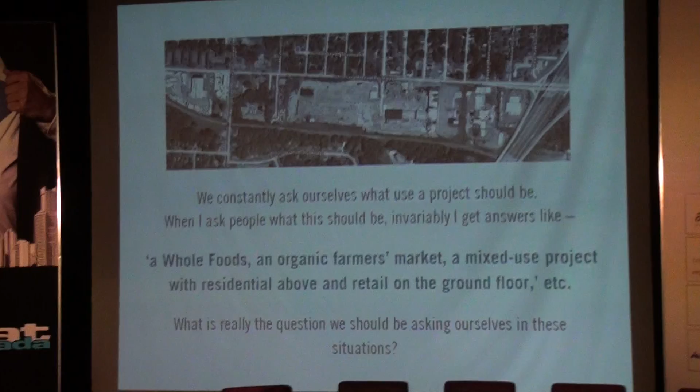But over the years, especially over the last 100 years, we have changed the way we think about cities. And so now, we look at a site like this, and we think, what can that be? When in fact, that site is 11 New York City blocks.

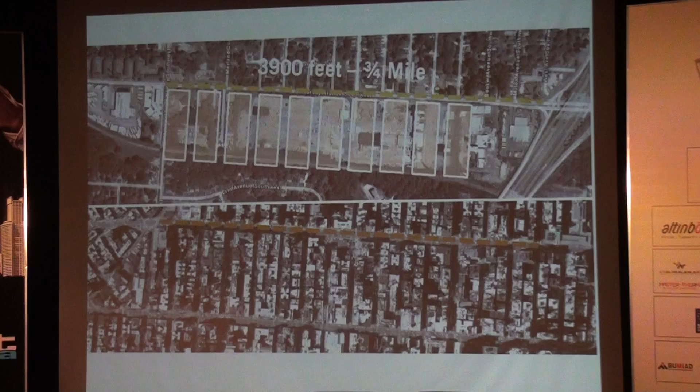It's important to understand that when we build blocks of this size, we create an adaptable, walkable, sustainable community. And so it has to do with the way we perceive of ourselves in the city. Think about the difference between being in Pera and being in some of the new suburban developments in Istanbul or other parts of the world. It's a very different experience.

So this is just a diagram that describes the difference in New York between walking across town with longer blocks and walking uptown with shorter blocks. It's very similar to the idea of walking up and down İstiklal Street, right? Or walking through Pera, where you think you're moving much more quickly than if you're in larger, more disconnected areas. And this will have an importance on the way that we think about cities.

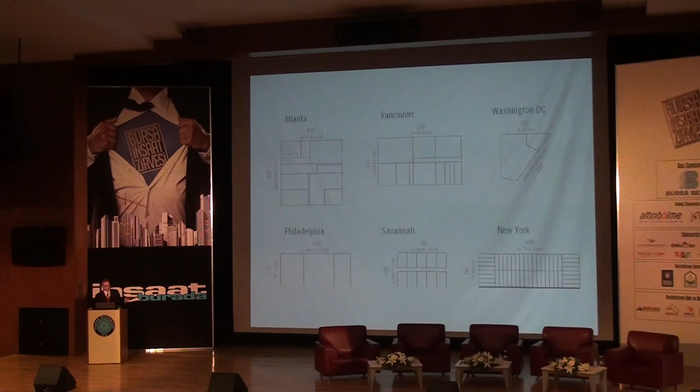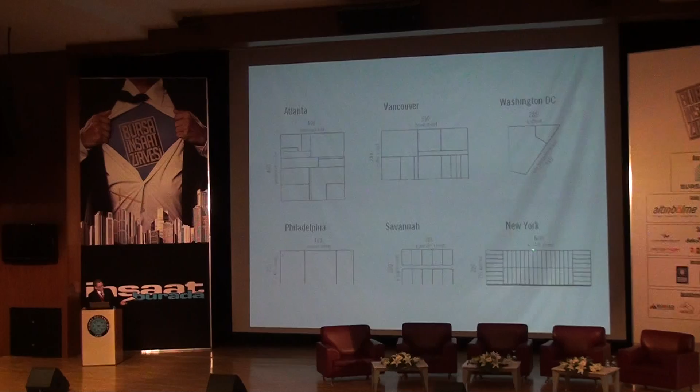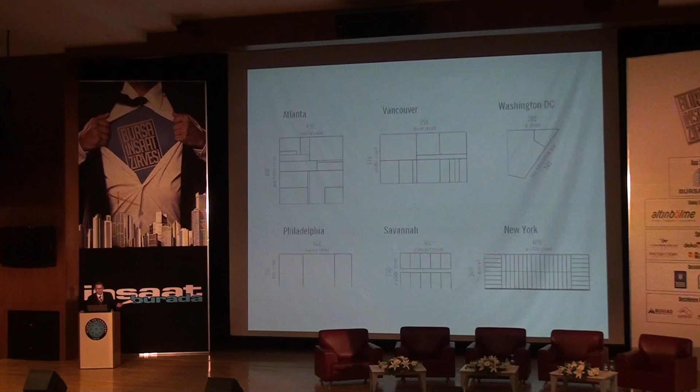So we look at the size of blocks in high-functioning cities like Istanbul. Please remember that the Empire State Building, the largest building in the world for half a century, was on a block that was essentially 60 meters by 100 meters. 60 meters by 100 meters held the largest building in the world in the 20th century.

But this is what's happened. We have very interesting cities with all kinds of great things and all kinds of ways to move through them. We move the bad stuff out because we don't want people to be unhealthy. But then we decided we didn't want to live in the city, so we moved the houses out. Then we decided we didn't want to live with people who made different amounts of money, so we organized neighborhoods based on prices, based on class.

Then we got rid of every kind of transportation other than cars. So if you spent 2 hours crossing the second bridge or the first bridge, you know exactly what I mean. Then we connected everything with highways. And if you think about the primary way that we move through urban areas today, it is all about planned highways, about capacity, and about moving large volume of vehicles.

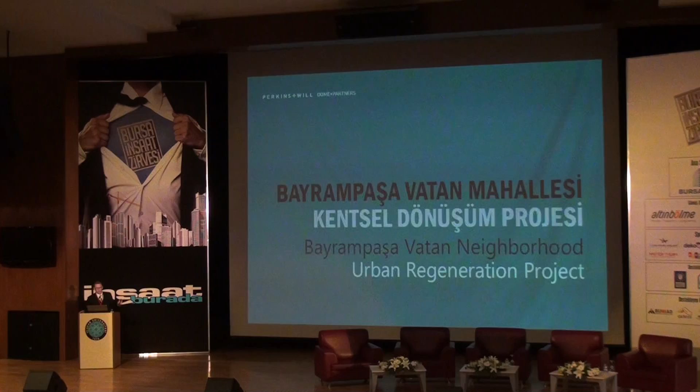This is a neighborhood called Bayrampaşa, and it's one of the urban regeneration areas. Now this is critical because remember, in Istanbul, there's a kind of amazing fabric in the city that is slowly being lost. And we have to think about that as we redevelop.

Our idea is that these areas need to be replicable. They need to preserve the neighborhood character, not exactly, but preserve the character. They need to add value because this is the financial mechanism through which redevelopment occurs. And they need to be resilient, because remember that these are all based on the idea of creating Istanbul and other cities as more resilient urban areas, both from natural disasters but also economically.

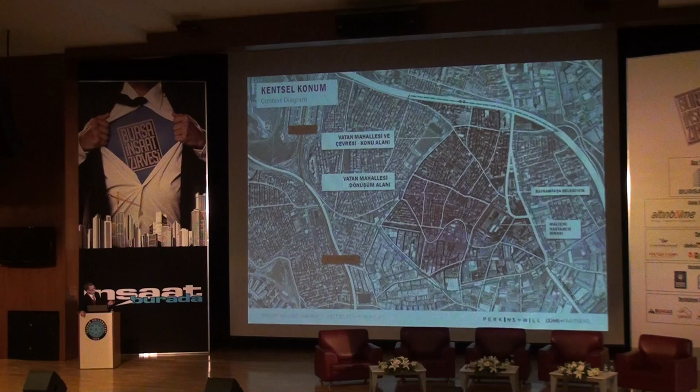So we look at this area, understand the characteristics, create a general relationship of the places, but then we do something very different than what most other groups do. We put in place a street framework. The street framework is the exact same thing that Hippodamus used when he planned Miletus 2,500 years ago, and in fact, was the only way we planned cities for 2,500 years until the middle of the 20th century.

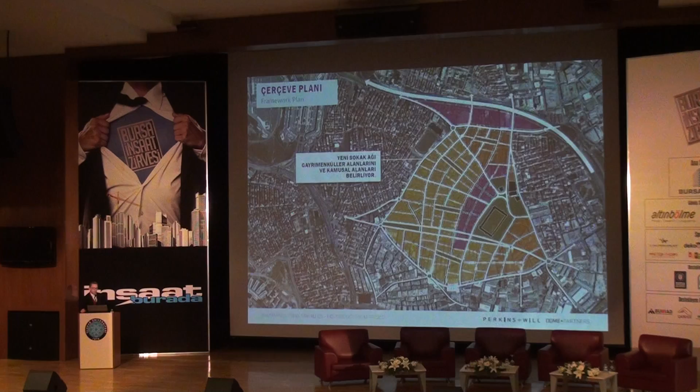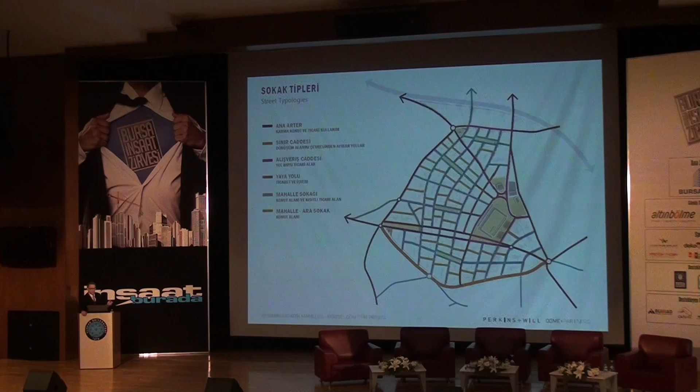And we end up with something like this, which you've all seen many times in many places. We create a series of different kinds of streets because these are important. They're not just about moving cars, they're actually the largest public space we have in every city.

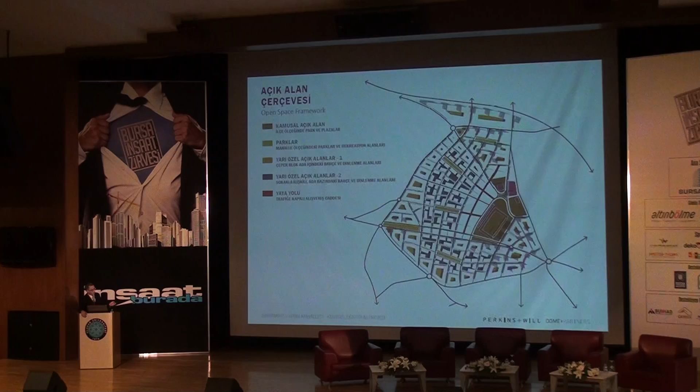And then we start thinking about the different characteristics of open spaces. Now, this is important a bit later, but it has to do again with thinking about parks as both public, but also areas for people that live in individual buildings. And so again, it looks something like this.

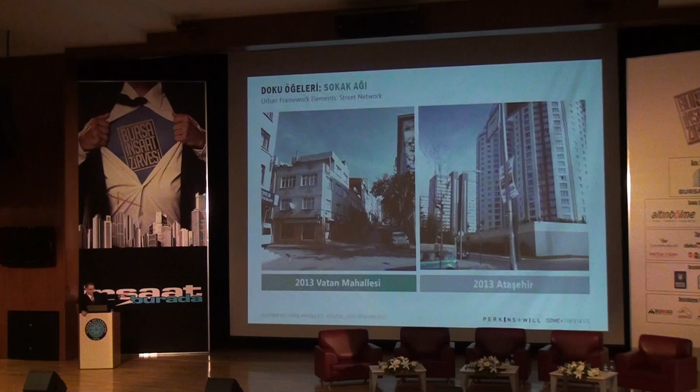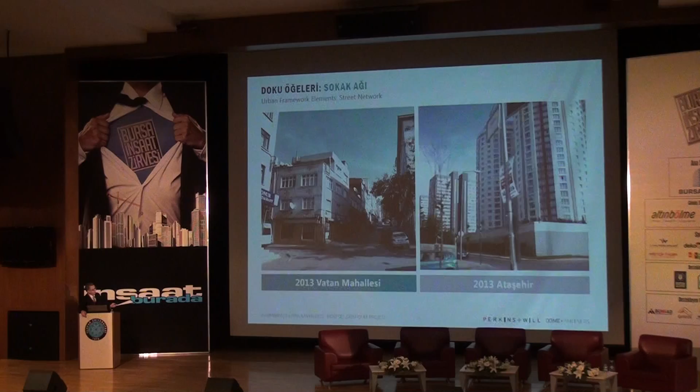This is an interesting situation because we have the Vatan neighborhood and Ataşehir. And there are characteristics of Vatan that are very different than Ataşehir. Ataşehir has been redeveloped as very big disconnected blocks. So when I drove here from downtown, there were all these new residential developments, but they were big blocks, big islands with no neighborhood, no connectivity. And this is something that's happening around the world.

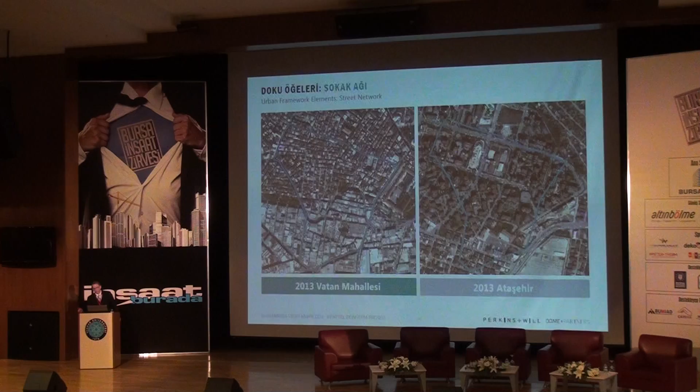So we look at something like the difference. Now this is really important, right? If you think of one thing and one thing only, the number of intersections in Vatan is 98 in the overall area of the site. If we take the same area and superimpose it over the newly redesigned Ataşehir, we have 13. So what this tells you is that there is no public framework, nothing that facilitates and allows the change and refinement of the city over time in a sustainable way.

So if I want to change—if I want to change, where did it go?

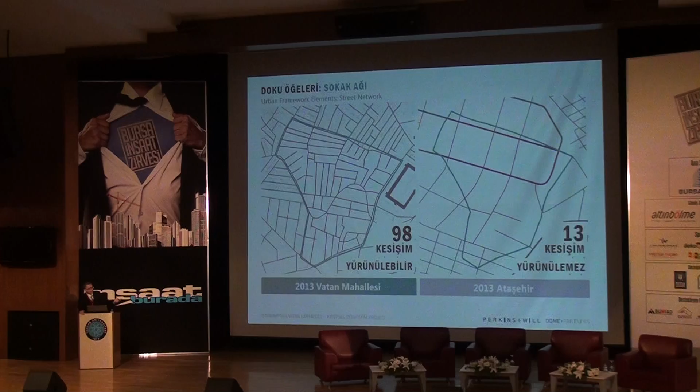Sorry, if I want to change something here, I have to change a giant area. But here, I can change a very small thing when the market changes or other events require change. It's about the way the form of the neighborhood or the city responds to how we live and work. So our goal, instead of 13 in this area, is to get at least 57, which is a much tighter development pattern.

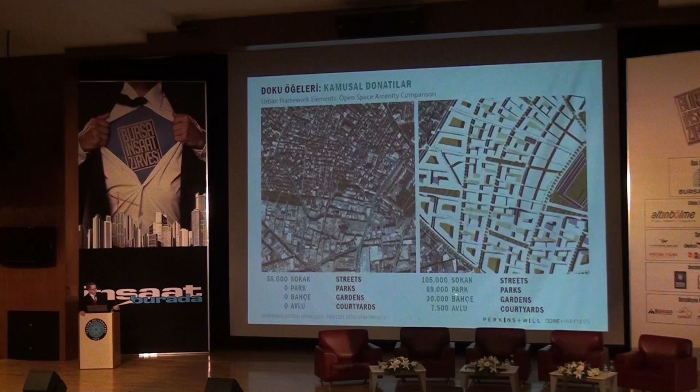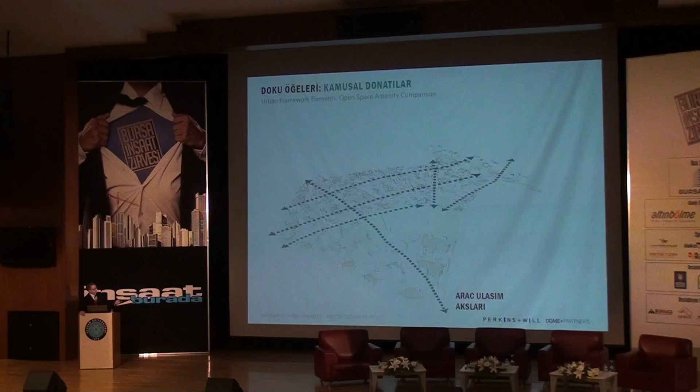We quickly moved through an analysis of all the different components to understand how these things work together, to create a logical distribution of the elements.

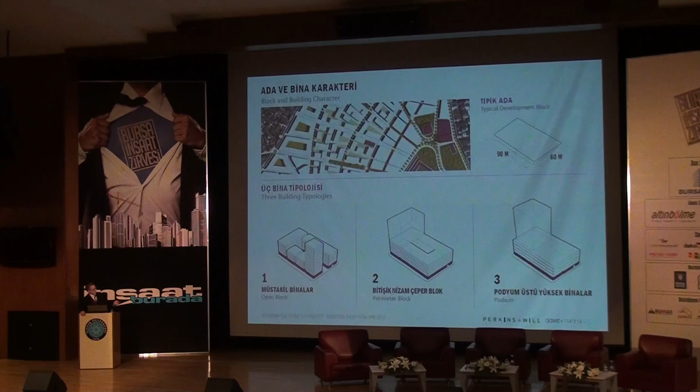This is also incredibly important: if you think about the way cities have naturally progressed, they didn't tear everything down and start from scratch. It was an incremental, piece-by-piece process based on certain building typologies. You can get the densities, the value, the return for every one of these projects based on very simple building typologies that fit within this block structure.

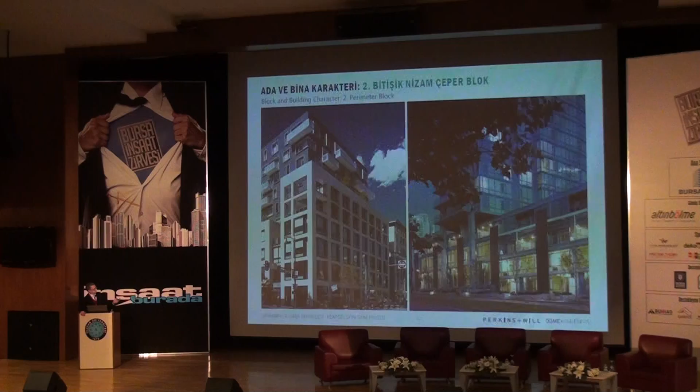This is an example in Paris, in the 13th arrondissement. Another example of slightly larger buildings.

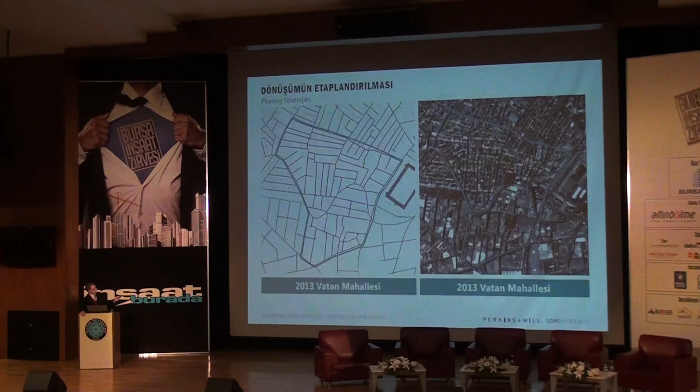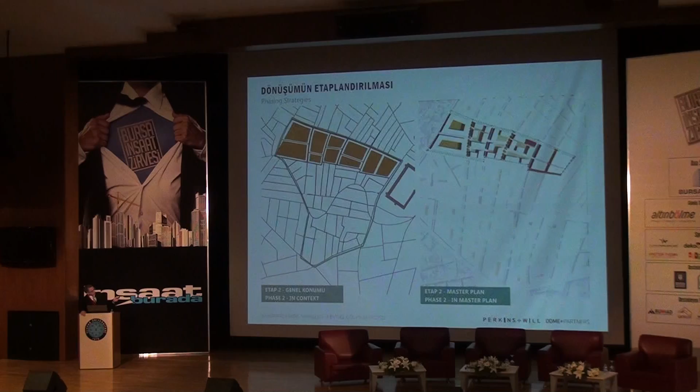So we are then setting up a framework for the transformation. Now, this is the existing situation, but we simply moved through, and because we're taking advantage of the existing streets and not getting rid of them, not starting from scratch, we can leave infrastructure in and develop incrementally in a much more logical way than starting from scratch.

But it also allows you to change uses. The way we plan in the world today is we start with uses: we're going to have some residential, some office, some college or university. But that's not the way cities grew previously. It's something we made up in the 1920s and 30s.

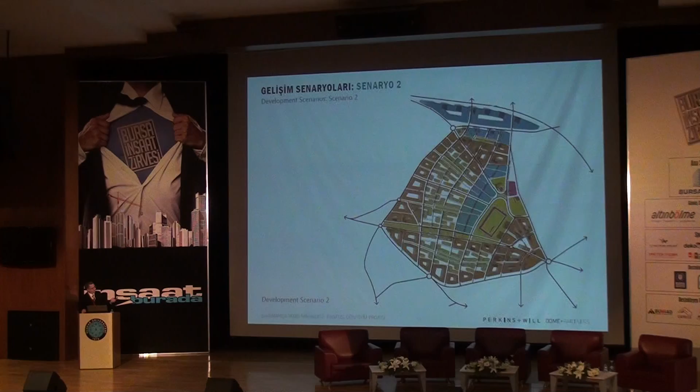These are simply showing different scenarios with this block framework in place that allow for the redistribution of uses. This is a very fundamental change in the way we plan. If you look at every comprehensive plan in the world, it starts with where uses go in the city, which is telling you how to build the city with the least permanent thing. It changes continually. It's absolutely crazy.

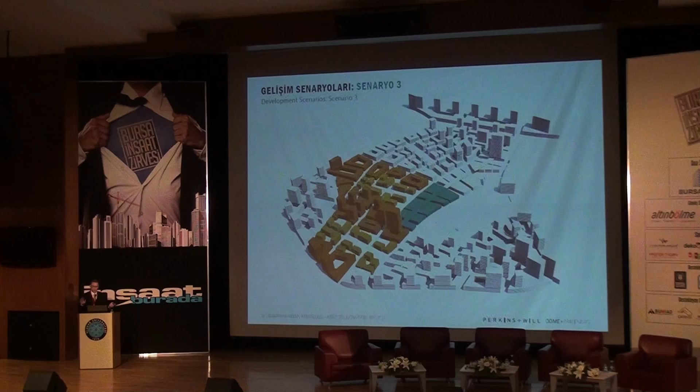I don't know how this is translating. Again, just images.

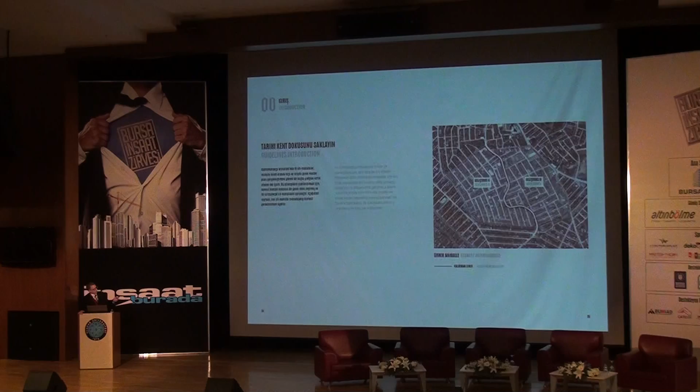So then we have to figure out how to regulate for this, how to write the guidelines. This is another project we're working on, Gaziosmanpaşa, excuse my translation. It's putting in place the guidelines for the way we would do this, taking an existing area and describing the intention and goals for block and street distribution. We want them to be very flexible, very developable, but also very walkable and as small as possible.

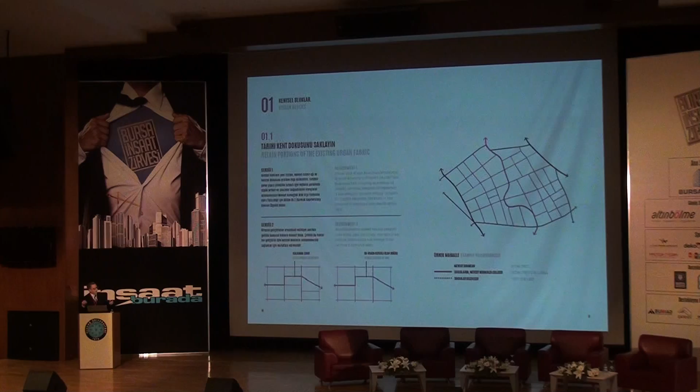Okay, I think I'm pointing in the wrong direction. We actually protect where these things go. Remember, the streets are the most permanent parts of cities, so they should always be the first things we lay out. Then we have development blocks, or development areas, that move into these.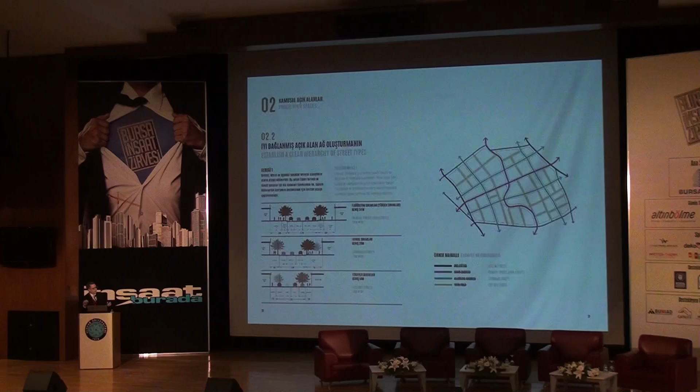And then we think about the public spaces. The public spaces are very clearly delineated as parks and streets, not private elements. And then the street types, again, just very simple, clear delineations of the way this works.

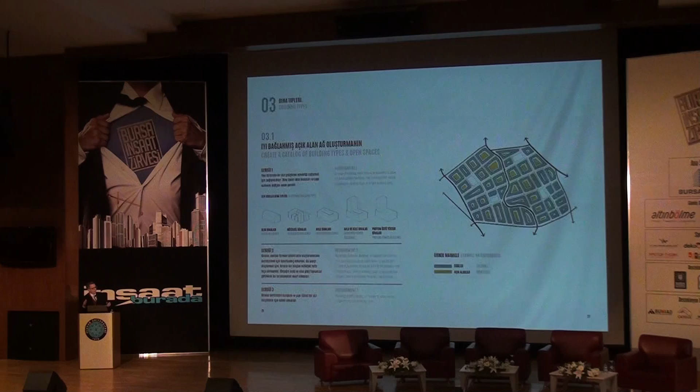And then building types. We test all of this with very complex algorithms based on programs we've set up to ensure you can get the kind of development that you would want. Now, I'll say something interesting about this.

We've also begun to superimpose the idea of pedestrian connectivity. So even where we've got slightly larger blocks, we can allow developers to come in and create internal spaces as they might want to. In a city like Istanbul, especially with densities, the more connections you can get, the better. It also solves a problem of having private courtyards.

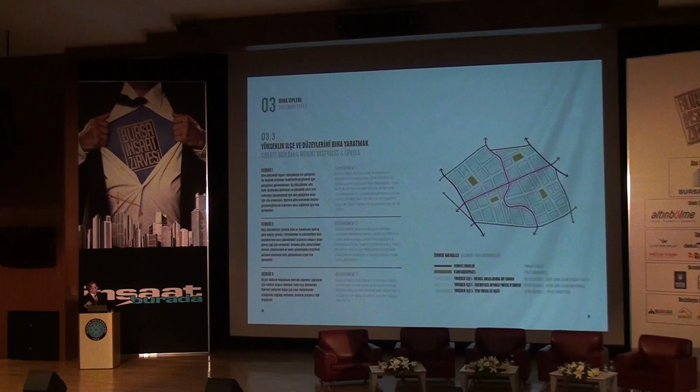And so then you simply superimpose heights, which is always an issue in Istanbul, in a very simple way. But what you ultimately get to is a very, very simple projected framework of streets that is then tested to make sure the buildings can work, and then you put in where the uses go, and the uses can change very easily.

Now, I will say that in the end, the work we got back from the municipality required that we take streets out, because there's this idea that bigger islands are more flexible, which is absolutely untrue. If you think about Manhattan, about New York, it has some of the smallest blocks in the world, yet it's the most flexible system you could possibly imagine for a city.

So we're doing things to get to certain points, but we're actually making decisions that get us further from where we're trying to go. The municipality came back and took a bunch of our streets out and said you can't have those streets because it reduces flexibility, so we had to superimpose private streets that would get used like public streets to create the same framework. It's hard for me to explain the impact this has, but it's impacting, because I work with...